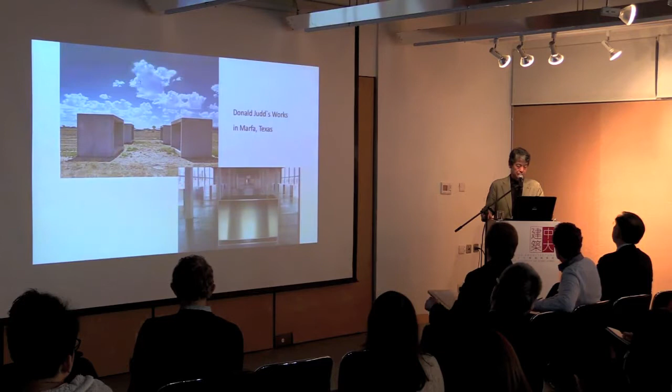Bill Gates was surprised with one statistic last fall. That news covers the cement consumption amount in the past 3 years. It seems to me there is too much construction activity going on every day, plus people receive that news so quickly and so easily.

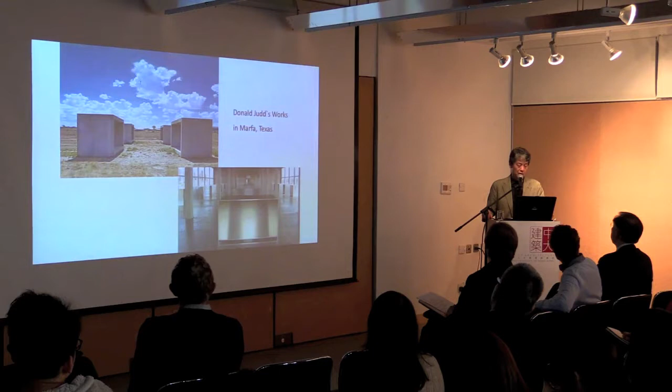Subsequently, we get fed up with that everyday news, and perhaps we have been paralyzed to a certain degree. Under this uneasy circumstance, I wish my design work to express its own individually acquired and developed themes. Each has its own degree of expression, each demonstrating the developed idea in built matter based upon the awareness of all.

Particularly in the stage of construction, we should pay attention to the whole of the matter of the building. In architecture, good works never result from man's arrogance. I strongly doubt personalized, expressionistic architecture becomes valuable. What it wants always surpasses what I want.

The idea of offering is the one which I am always interested in. Architecture must consciously remind us of the importance of all. We should carefully sense the quiet voice on the building site. If we start to pay attention, we can sense the provocative emergence of the fundamentals of material and of the site. We must patiently be aware of these.

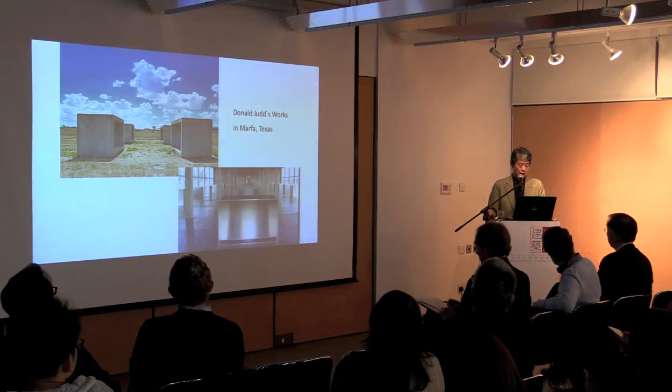The great offer always autonomously comes to us, receiving sure inspiration from the site. I would like to proceed in my design work—that is what I am looking for.

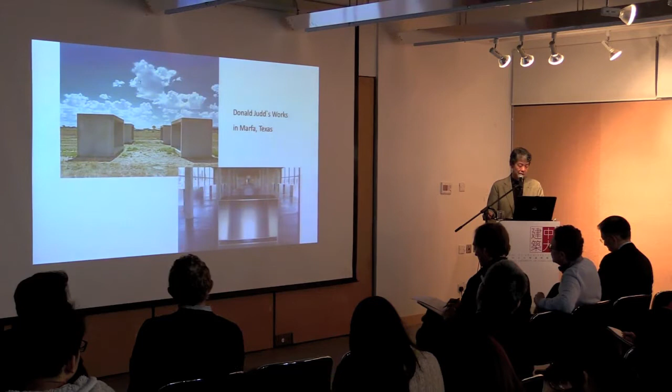Overall, the issue of architectural tectonics and siting become the two major focuses from which my architectural exploration starts. My design work develops its theme through the positive interaction and appropriation with the site and the architectural tectonics. It carefully listens to the quiet voice of the site, as well as investigates architectural tectonics. Ultimately, each project aims at its own inherent place to be.

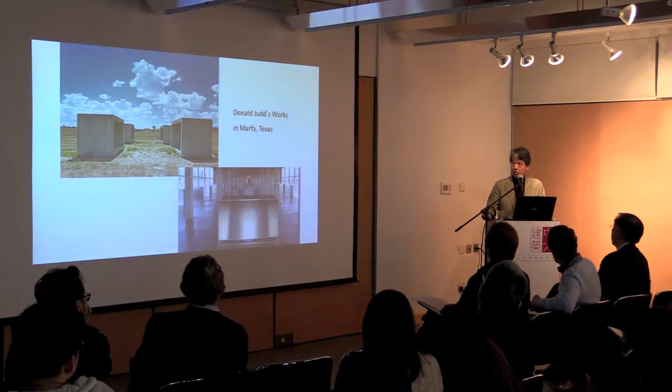If the executed design work of mine looks as if it has been there from the beginning, this is nothing but my intended goal. The first project of today is a wood structure building—a cow barn in the ski resort near Hokkaido, the northern island in Japan.

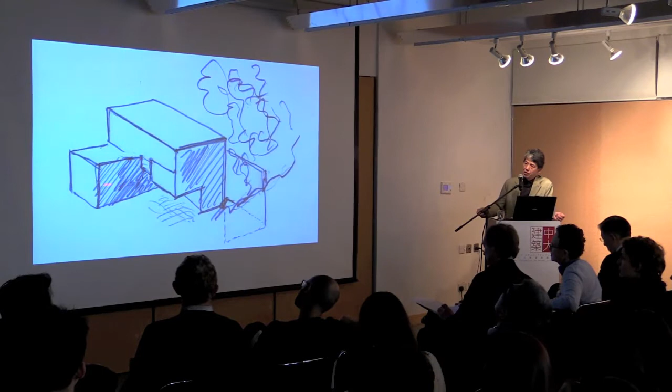The strategy here is to make this sunken courtyard just before the greenery, plus a big cantilever of about 3.5 meters, supported by this side wall. And a garage structure here with a rooftop balcony for family use.

This is a house for 2 family occupiers. This is a view from the interior looking at adjacent properties, green like that, after this sunken courtyard. And the retaining wall here is also expressed with the cedar grain texture.

This is the staircase leading to the lower floor, that is the basement. This is the glass box of the staircase leading to the lower floor, which has three bedrooms along with this sunken courtyard. This is the detail of the staircase.

The thinness of the slab sticking out from the main body is an element I concentrated on for the design. It is supported by solid steel columns - here, 1, 2, 3 columns, which behave as a mullion for the curtain wall to hold the glass as well.

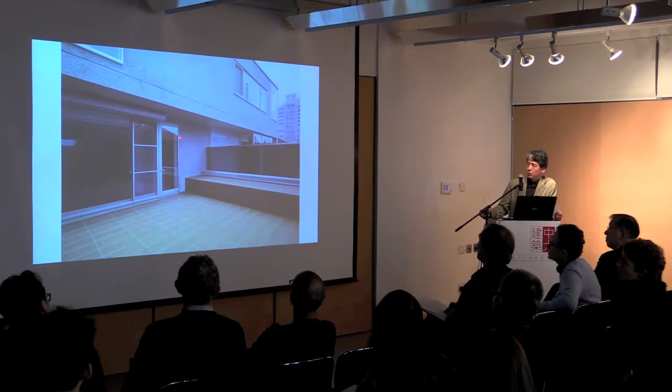So the glass extends to almost the end position of that wall, that door. Or not such a detail, but the use of the glass - here I use white glass, which is very transparent, different from regular bluish or greenish glass. White glass is expensive, but it's good to use for this kind of residence.

So that 3.5 meter overhang above the carport here is created by the side wall. One full height of the floor is used as a beam to support the living room floor at this end.

And this is the main entry to the upper floor house owner's residence. And here is a garage door, cladded. It is made of extruded aluminum panel, and it has a butt joint somewhere here—you can't see it exactly, but there's a very thin butt joint.

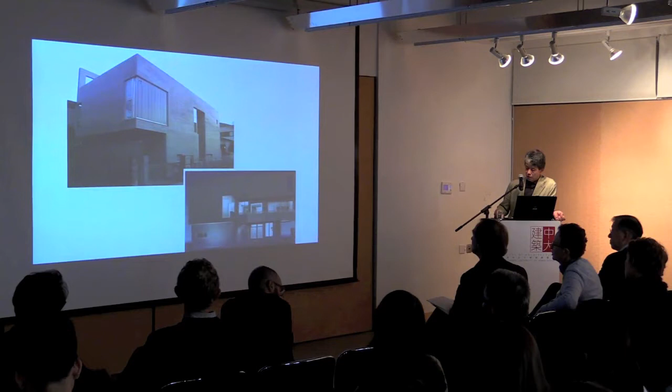I will show one image here around this entry door next. This is the canopy of the entry door. It's a perforated aluminum mesh for the waist-high wall for the balcony. And this one is just cedar grain textured concrete. And this is the window for the master bedroom.

This is the interior. I said it's a double height dining space. This one is the other side of the room, and here you could see the roof.

This is the picture showing the corner of a traditional Japanese tatami room with mud plastering work like that one. Yet I applied some modern material, like frost mirror glass on top of plywood, as a sliding door.

Here is a guide. And here I applied special paint on top of plain aluminum. That special paint is used for automobiles—we call it pearl mica, with some powder of pearl included. It's really beautiful painting, but this picture doesn't show it exactly.

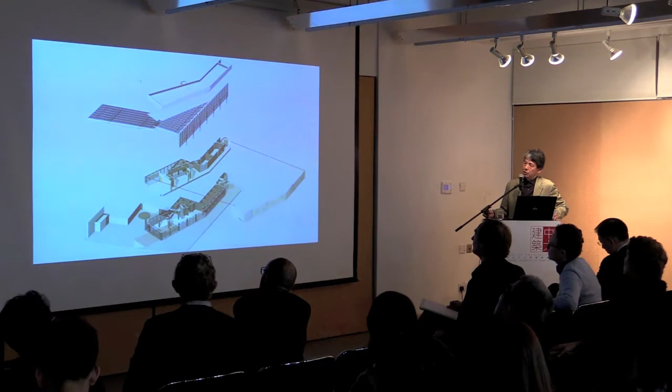So the strategy is almost like an open palm situation—an interesting configuration. This side becomes formal appearance, the other side becomes very bright. This open palm configuration faces the frontal side toward the main street, with the back part holding some private, intimate space with single trees. The cafeteria faces that direction.

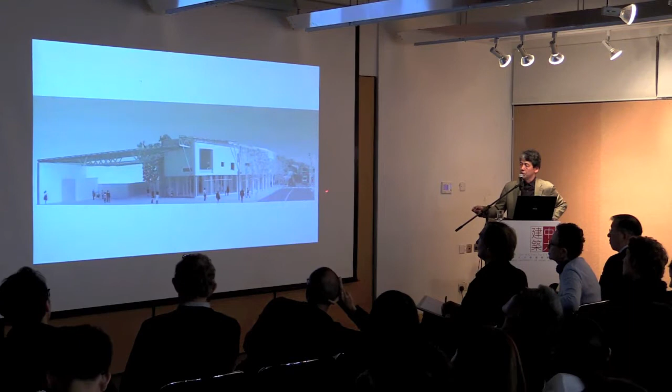So this is the open palm configuration of the main body, with glass elements extending the two wings, this side and the other side. Structurally, that sticking-out element holds the beam for the frontal part and back part. This structural element is supported by an additional bracket, so the roofing here and the other roofing are two conspicuous elements, positioned toward the stream or toward the main street to the station as a gesture. It's one thing I put some energy into developing.

So this is the gap situation of the V-shape glass screen and main body. This is a steel structure public building.

That building, which I designed, is an international student dormitory with 29 rooms. It's located here—this one is the building I designed.

The difficulty of that siting is two things. One is the mitigation of the grid iron system that dominates this entire campus, ending at this particular building which has a classroom. This area is used as a dormitory area for students plus staff housing.

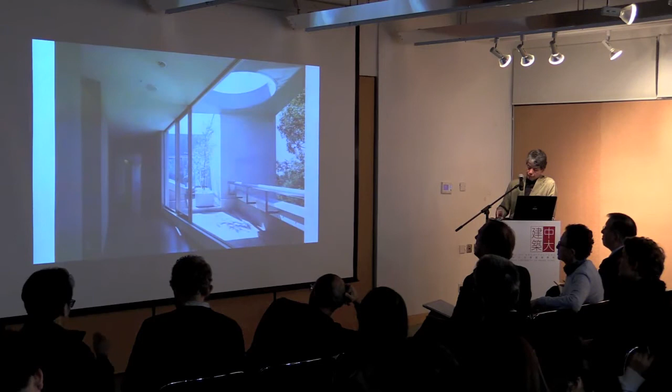Again, I used the open palm configuration—open palm like this way—to hold 29 students' bedrooms. This is the ground floor situation.

This is the final classroom building following the main grid, and this is the adjacent building following the other grid I mentioned second. This is the third angle I introduced.

So the open palm situation holds 29 bedrooms here, and the private part is allocated as the main dining space with a double height glass screen overlooking the street. This part is the kitchen area.

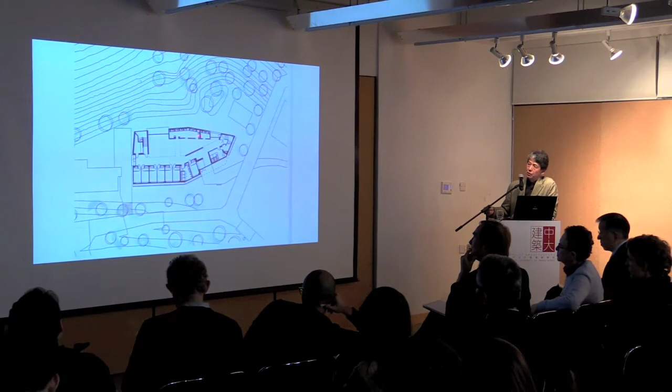Here you could see the dotted line—above the kitchen there is a laundry and shower room for students. This is the interior view of the main dining space.

Here, I thought it would be nice to introduce some notion of response to the program. This is a building for international students who spend at least 4 years for undergraduate education, maybe plus 2 or 4 years for graduate school. So these international students continuously stay in this dormitory. I thought it would be nice to have a certain core of the building and some memorable element to hold people's memory.

Maybe this is the dining table here. So for this appearance, I intentionally designed a little bit of a formal appearance, plus some sense of serenity, a tranquil quiet space for them to think about something related to the program.

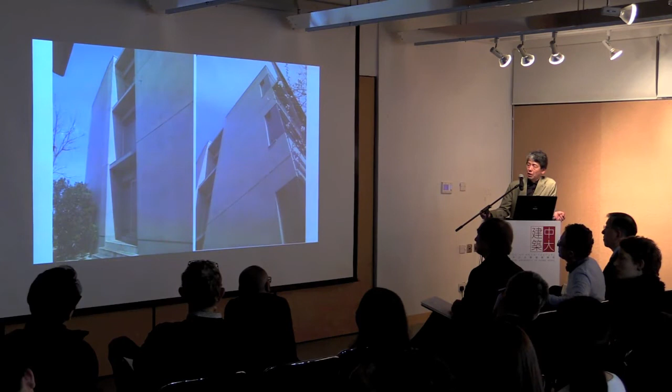Actually, the construction of this particular building has been done very nicely, so much so that the team of the site responsible person received an in-house award because of the nice quality of the construction.

And this is the exterior concrete surface, again cedar grain textured wall, such as a detail like this corner. It's a very straight line, and it's not easy for site-poured concrete, but they have done quite good work.

This one is the last project today. It's a guest house for a small private company. It is a small company, and the owner of the company uses this one as a private guest house, as a private house.

The function of this guest house is not complex, very simple. It's just a place to host guests. Then I thought it would be quite interesting to introduce some generic logic towards the formal development of this particular architecture.

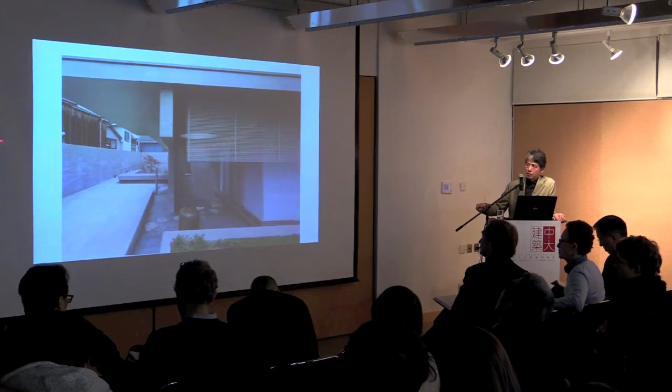Here there is the main entry to this guest house, or right next to this glass window, there's a little patio here, I call it front patio. Behind this entry position, there's a courtyard space surrounded by this property boundary wall, an L-shaped property boundary.

And this is a picture showing the courtyard situation with entry point somewhere here. That long beam, which supports the roof structure, which is made of steel, is supported by the first wall and these three columns. And it has an insertion of this element of the hearth, that is the kitchen, covered by, cladded by aluminum panel.

So this is a hearth element, kitchen, cladded by aluminum panel, and three columns to support a very long beam in order to support the roof structure above. And this is a dining room, right next to this main courtyard.

So this is a diagram which I have been explaining. Here's the site, and putting that podium or a base or foundation here as the first element. And the second element, according to Semper, is a hearth, some central element of the architecture. In this case, the kitchen.

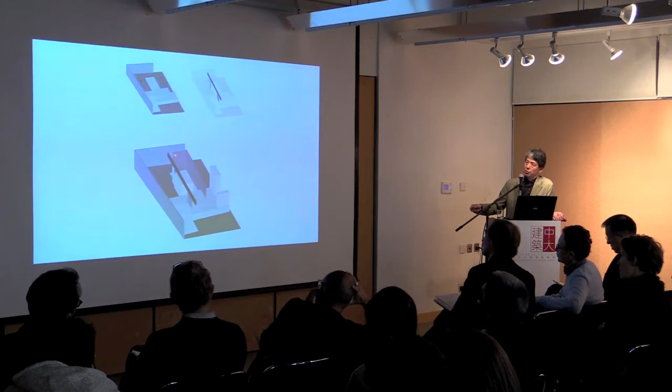And the third element is enclosure or coverage that is supported by this beam. So, as a diagram-wise, the first element, the second element, the third element as a fourth, and in order to hold or support the roof, I introduced other L-shaped elements for the concrete wall here, other elements like this concrete walls.

That L-shaped wall along the property boundary generates that courtyard space here. So this is a computer drawing to show that situation.

Here, on top of the garage, I can use as a landscape or terrace or garden, right next to the upper floor guest room. And this is the main entry there. This is the inserted element of the hearth underneath of this long beam.

That long beam is supported by two elements. One is this wall, the other is three columns like that one. And courtyard space, which is the main one, and very small patio space as a frontal one, as an introduction to this approach, and back patio as well. And a hole to provide light for this frontal patio, or cutout to provide light for back patio.